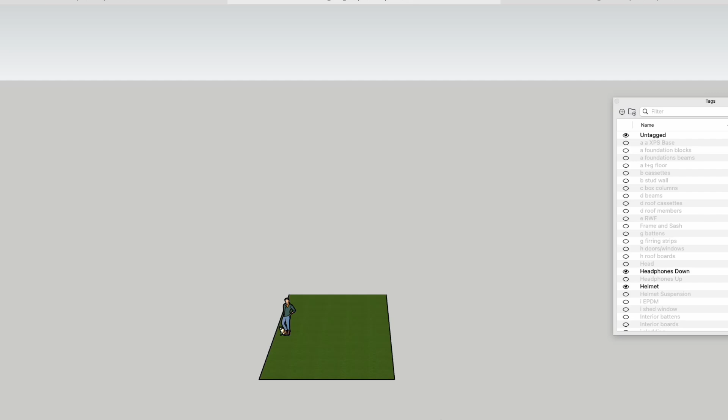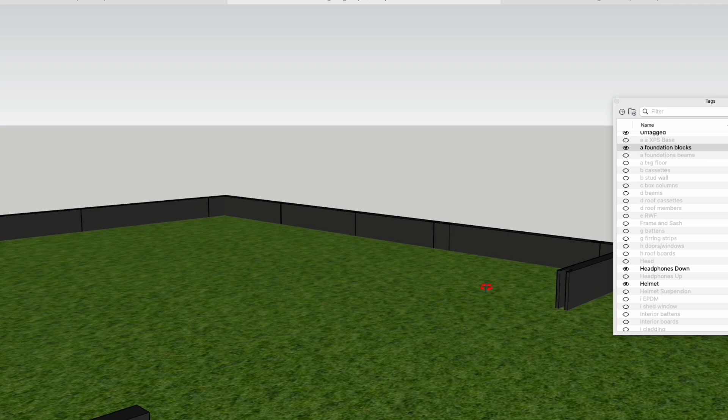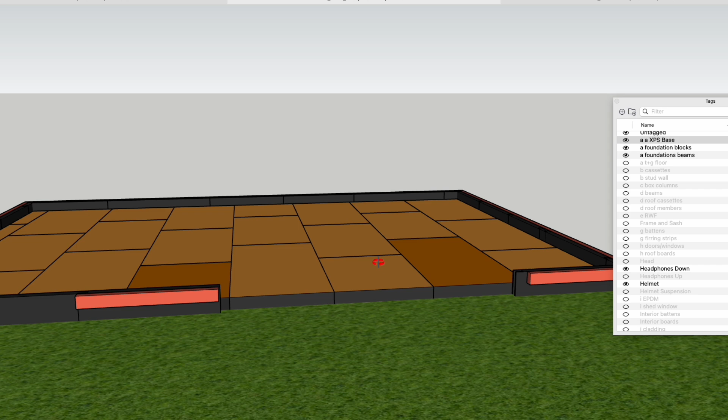Starting with the base, I've got these foundation blocks, which are going to give you the maximum height we can get, basically within permitted development. Inside those we'll put XPS insulation, which is very good under compression. It gives a very solid foundation for the floor, and it also won't let any moisture in from the ground. Then on top of that we just have a tongue and groove chipboard subfloor.

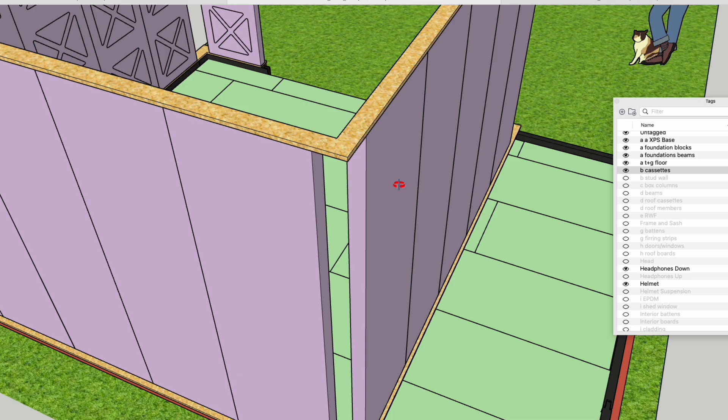Then our cassette - I think I mentioned I've reduced these from 100 millimeters to 75 millimeters. So they're slightly thinner, but once they're installed and the insulation's on the outside as well, it really won't make much difference. That's one of the cost savings.

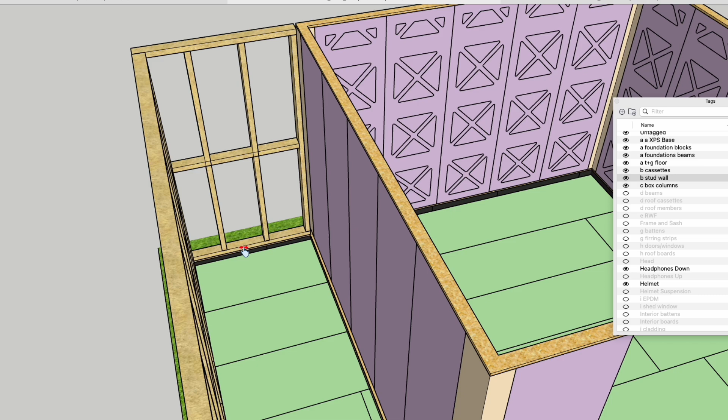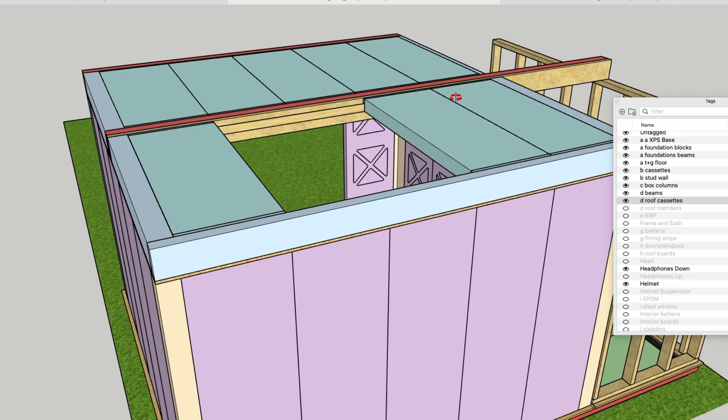Then we've got columns, and on the left side, for the workshop space, instead of using the cassette, I've just used timber frame, which is a standard sort of building. Then on top of that we have structural beams, and then the roof cassette. I kept these at 100 mil just to make the roof a bit better for the sun, so it keeps it cool.

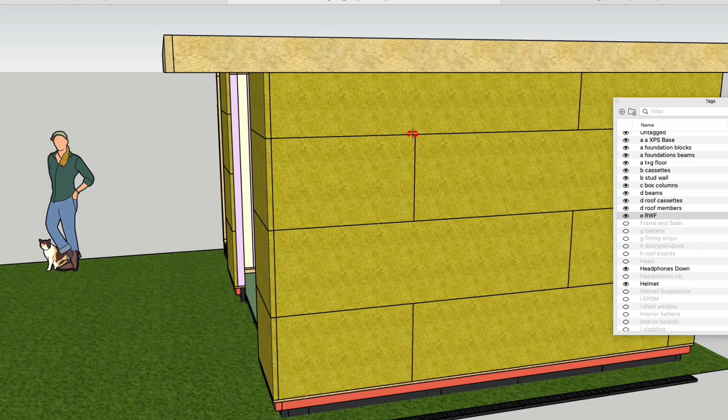And then we've got the rest of the roof. Here's your overhang - you can see it's about 50 centimeters on that side. Then we've got our external insulation, which goes all the way around, as you can see. And then our battens again, and furring strips on top.

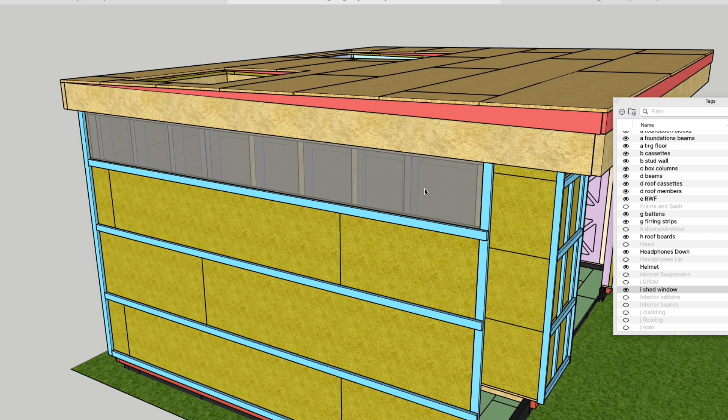Then we've got the roof boards, and here was an idea - I don't know if you like this, Tom, but I thought I'd put in a translucent window here, essentially. This would allow a bit of light in, but probably not clear - I was thinking of an opaque sort of acrylic there.

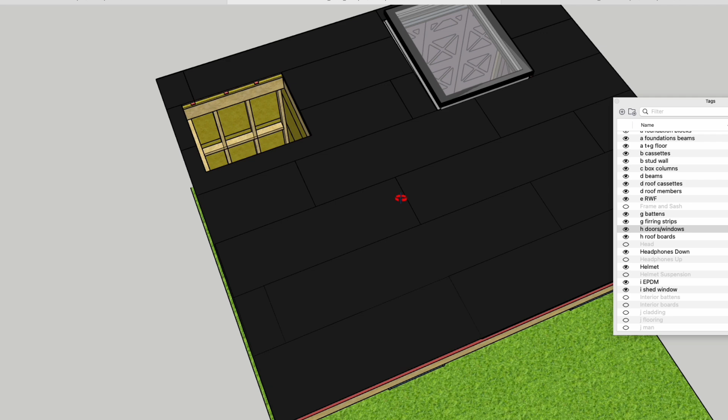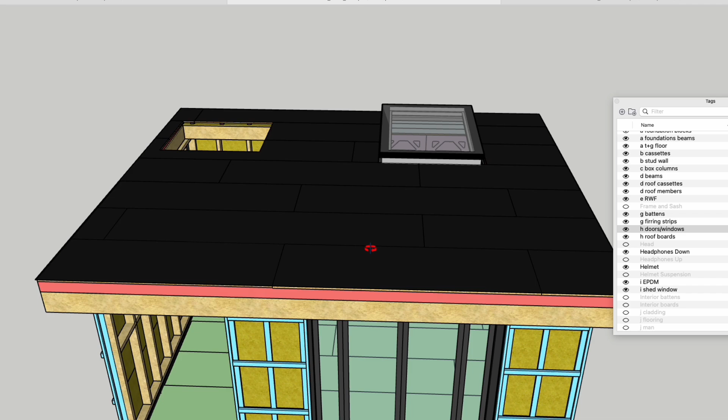Then we've got our roof rubber on top, and that's our window there - for some reason that hasn't worked, but there is another window here which would be an opening one, a plastic dome window, I think you might know the type. I'll send you a photo of that, because for some reason that's not come up here. And then just some doors at the front to give you an idea.

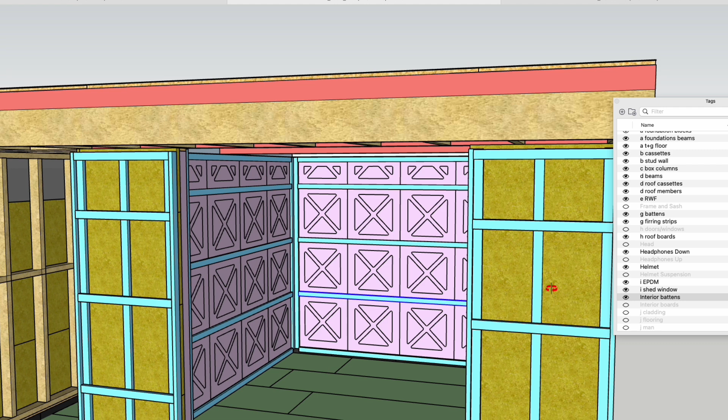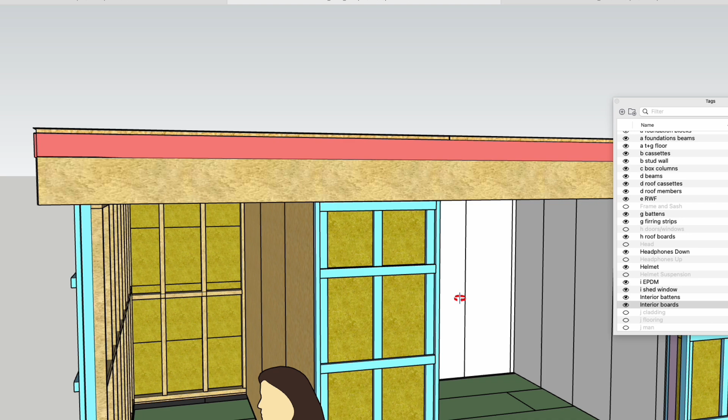Okay, let's get rid of that one. Then on the inside, I'll take those out again, and then we've got internal battens, and I found a new option - instead of plasterboard, there's these Norwegian boards, which when installed wouldn't have these lines, but this is just to give you an idea. It basically creates a smooth wall which can be painted. They're pre-primed, and they're just wood compressed with natural material, so very good for hypoallergenic purposes, I believe.

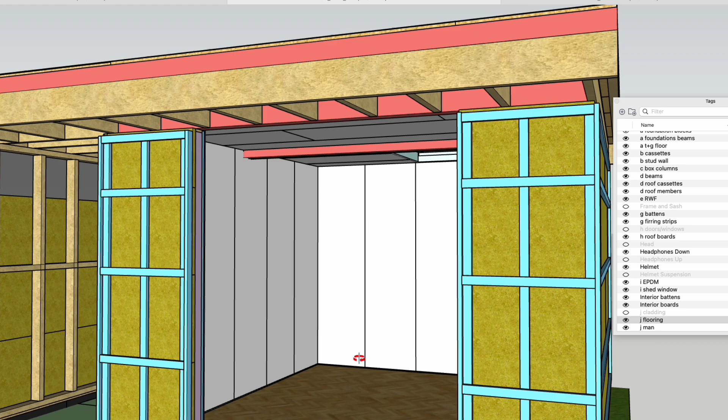Okay, and then what else have we got - just to give you an idea here, the size on the inside, Tom. And again, just a sample for the flooring - I've put a herringbone flooring, but that can be whatever you choose.

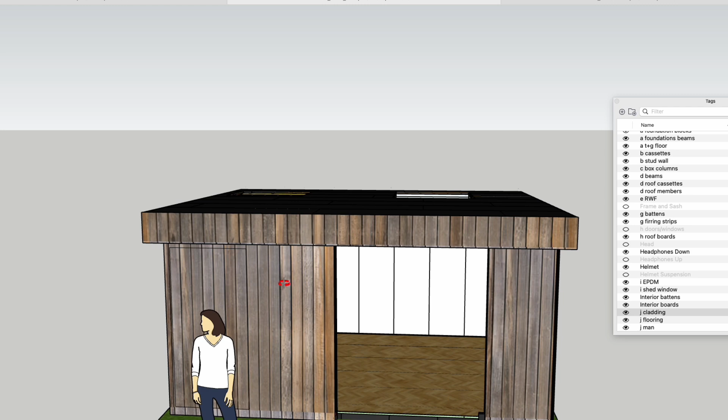So I put the doors back in, there we go, and then we can put on a bit of shadow just to show you how it looks. Now I'm not sure if this is the right orientation for your garden, but just to give you an idea of how the sun might move across the day.